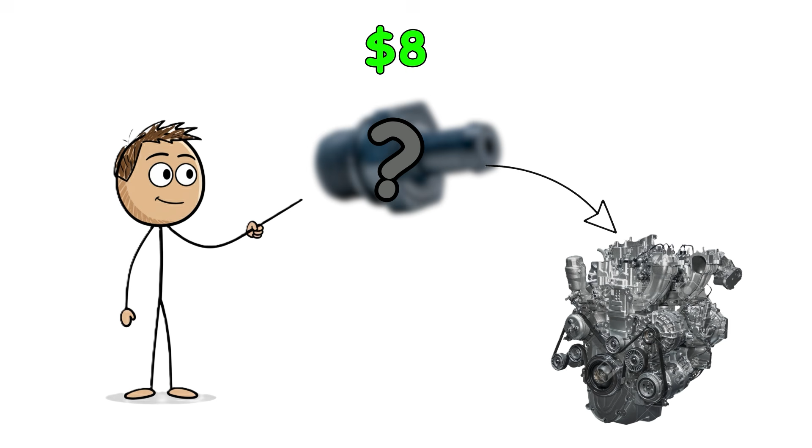There is an $8 valve inside your engine right now. If it sticks in the wrong position, it will suck oil into a cylinder and snap a connecting rod. No check engine light, no warning code, no strange noise. Just a destroyed engine from a part most mechanics forget even exists.

But the more common way it fails is sneakier. Your oil starts disappearing, no puddle, no drips. A mechanic puts it on a lift and cannot find a leak because there is no leak. The oil is being burned inside the engine where nobody can see it. You just keep topping it off every couple weeks wondering where it is going. That is this same $8 valve.

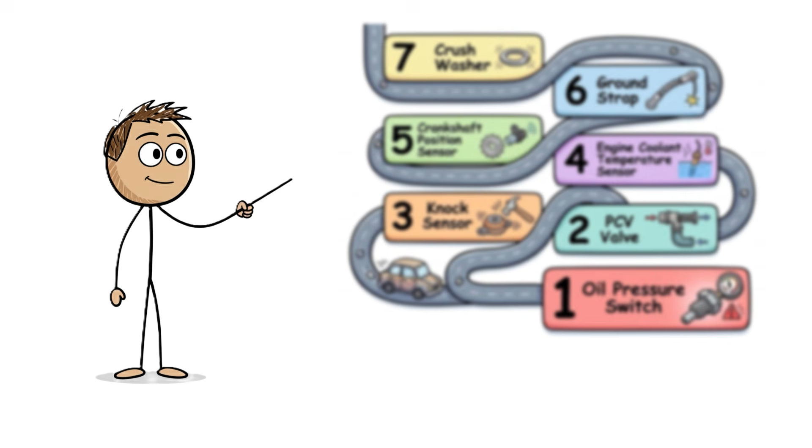That is just one of 7 cheap, overlooked parts quietly killing engines before 100,000 miles. We are counting down from 7 and building to the worst. That $8 valve is number 2, and I will show you exactly how to test yours in 5 seconds. But number 1 on this list is the one that genuinely scares me. A $20 sensor that can be completely dead inside your car right now, and your dashboard will not say a word. There is a class action lawsuit over that one, hundreds of thousands of cars. So stay with me. Alright, starting at number 7.

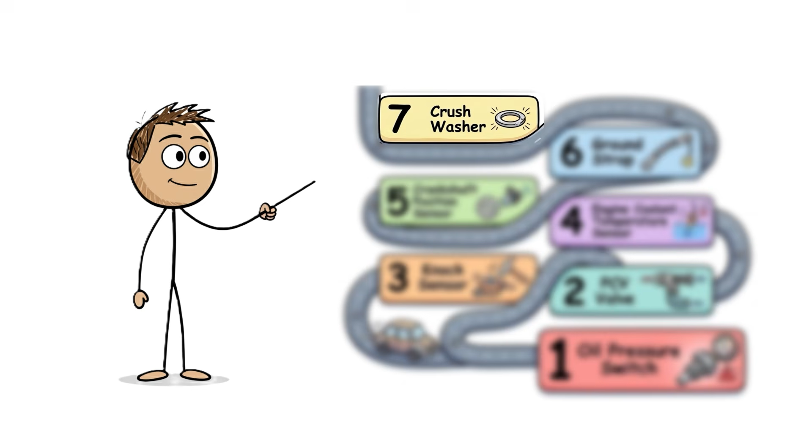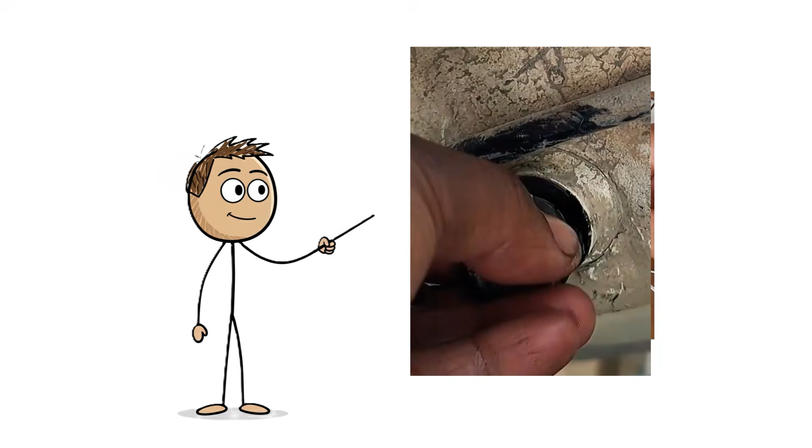The crush washer. If you have ever changed your own oil and woke up to a puddle under your car 3 days later, this is probably why. This tiny metal ring sits between your drain plug and the oil pan. When you tighten the plug, the washer crushes flat, and that deformation is what creates the seal.

It is designed to crush once. After that, it cannot seal again. Trying to reuse one is like trying to reseal an envelope you already ripped open.

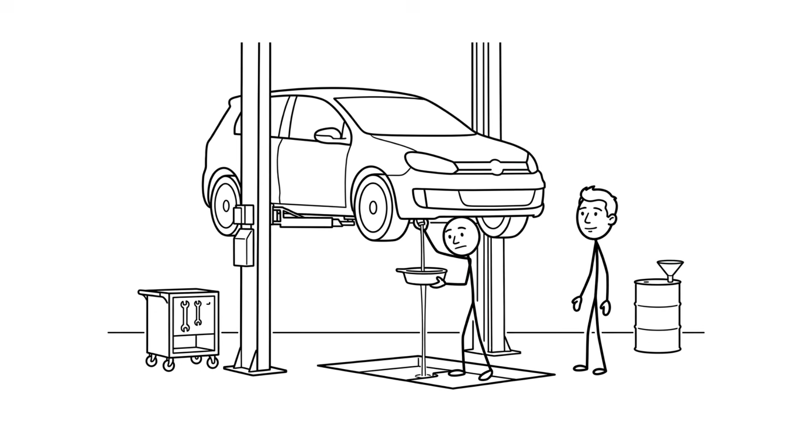Your drain plug is hard steel. Your oil pan on most modern cars is soft aluminum. That washer is the only buffer between them. Without it, steel grinds into aluminum every time you tighten. Do that 3 or 4 oil changes in a row and you strip the threads out of the pan. Now you need a whole new oil pan, over a $1 washer.

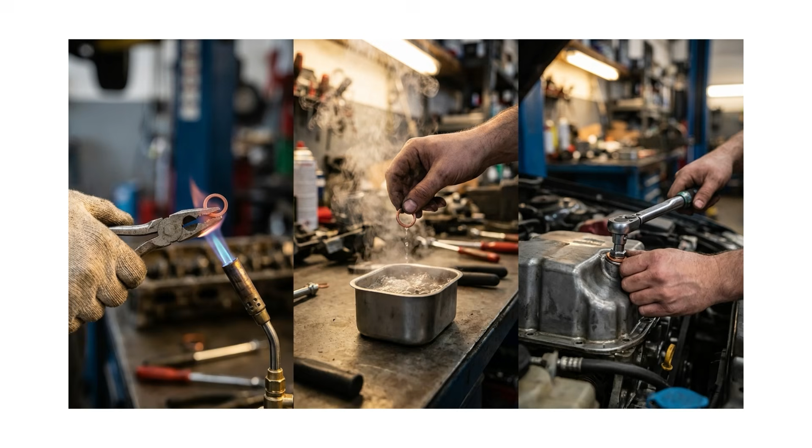Not all washers are the same though. Aluminum ones are most common, but forums are loaded with stories about them cracking under compression. Copper is thicker and more forgiving, and you can reuse copper if you anneal it by heating it to a dull red and quenching in water. But the favorite that keeps coming up is the GM metal rubber composite gasket. It seals easily even on damaged surfaces. The Stat-O seal washer with a rubber inner ring bonded to a metal outer ring is another solid choice.

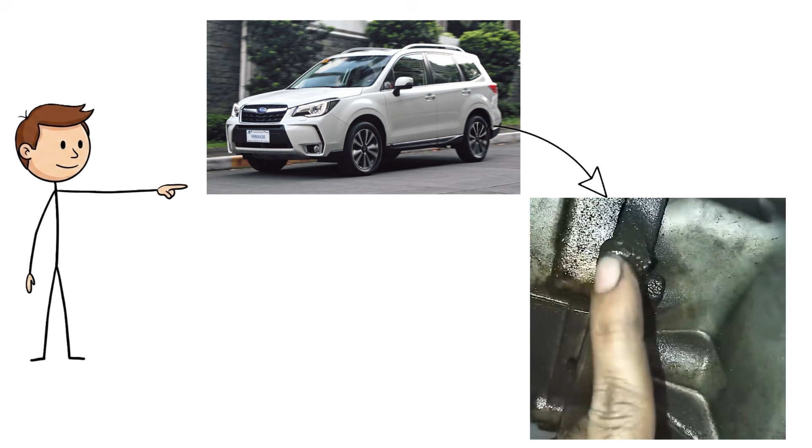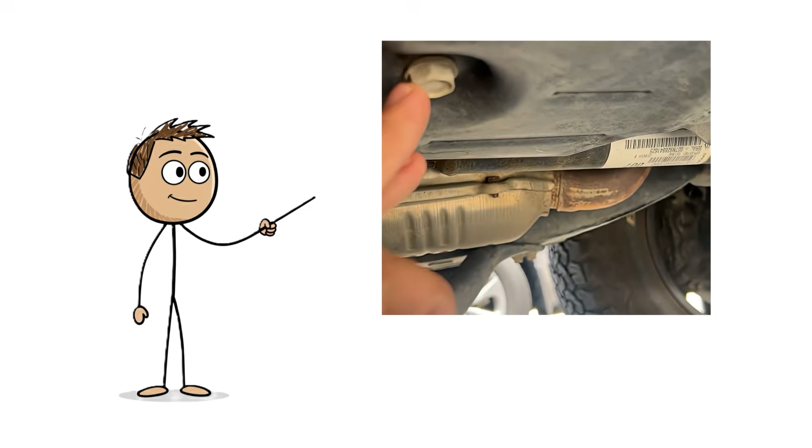Here is something that genuinely made me angry. Even buying from a dealership does not guarantee a real OEM part. One Subaru Forester owner kept leaking no matter what. Bought washers from the local dealer, still leaking. Drove 50 miles to the dealer where they originally purchased the car, got washers in genuine Subaru branded packaging, and the leak stopped immediately. The local dealer had been selling thinner aftermarket washers in OEM packaging. That tiny thickness difference was the entire problem.

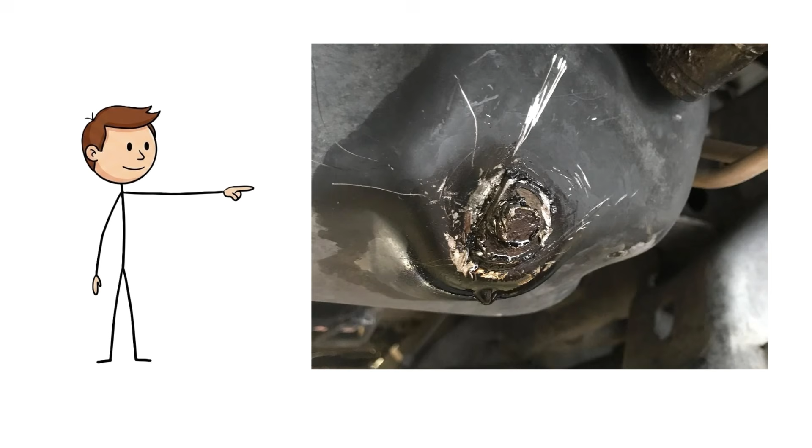Biggest mistake is double stacking. Your old washer gets baked onto the plug by heat and old oil. You cannot even see it, so you throw a new one on top. 2 washers and neither one sealing, guaranteed leak. Second mistake is not tightening enough, because the washer needs to actually crush, but over-tightening is worse. It dents the oil pan surface permanently, and no washer will ever seal on that spot again.

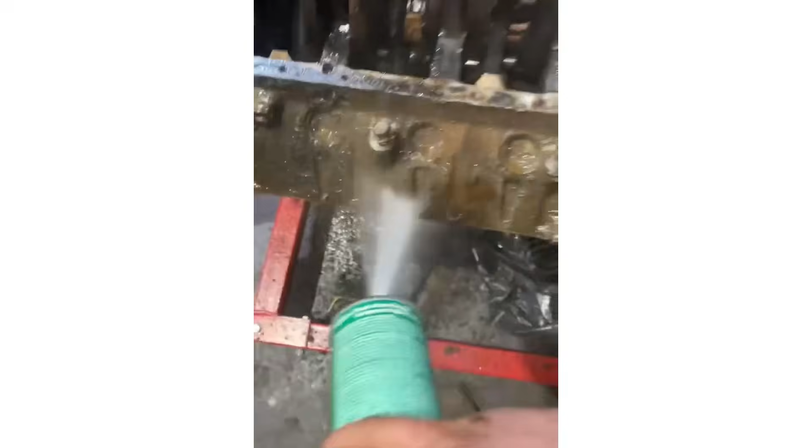Correct torque for most cars is 23 to 30 foot-pounds. For BMW M4's only 18. The crush washer does the sealing, not your arm strength. Get a torque wrench. Sometimes the drain plug is not even the leak. Oil from a valve cover gasket or oil filter housing can run down and pool right at the drain plug. Clean everything with brake cleaner, let it sit overnight, then check where the fresh oil is actually coming from.

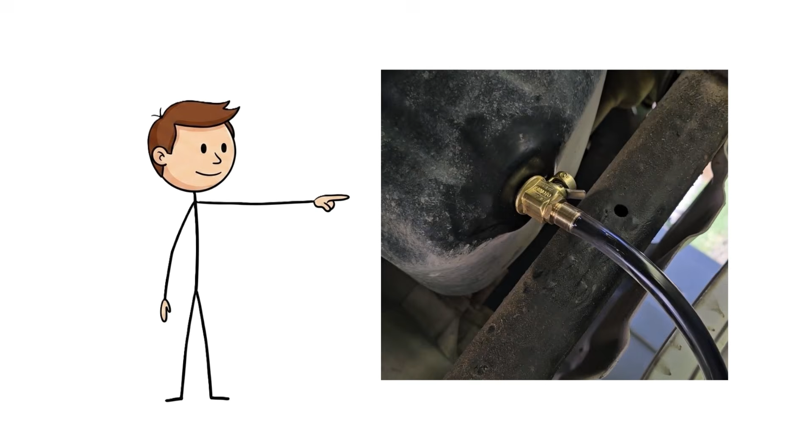Best upgrade is the Fumoto valve. It replaces your drain plug entirely, no more crush washers ever. Attach a hose and open the valve. People report years of 0 leaks. A crush washer costs $1. A new engine costs thousands.

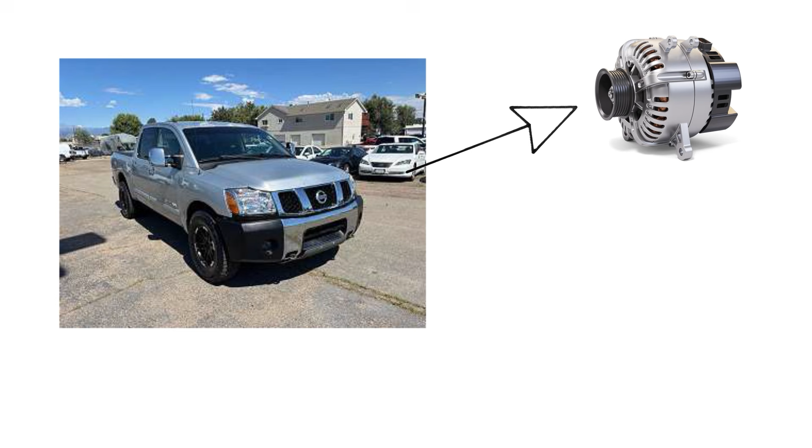Number 6. This one is a completely different kind of scary because we are going from a slow oil leak to an entire electrical system getting fried overnight. The bill was over $10,000. A 2005 Nissan Titan goes in for a routine alternator and battery swap. Everything works perfectly before the repair. Radio, gauges, power windows, everything. The owner picks it up and every electronic component is dead, all of it fried.

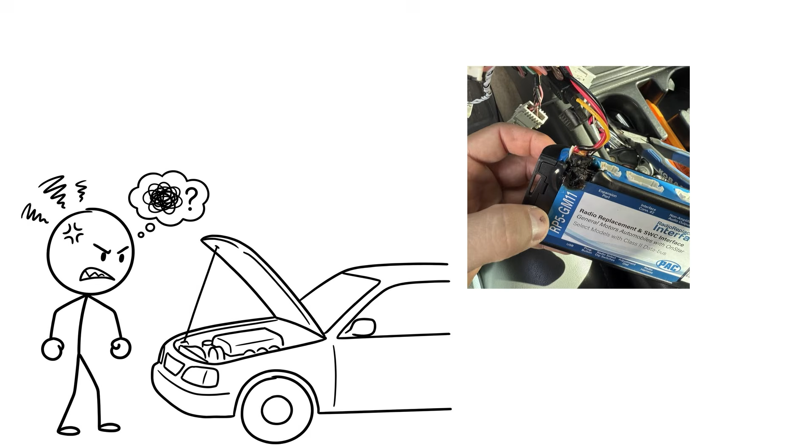The dealership wants $7,000 more on top of $3,500 already paid. Their excuse is that a faulty alternator had been pumping 19 volts before they even touched it. But if everything was working perfectly before they touched the car, how does a pre-existing alternator problem cause damage that only shows up after the repair? That does not add up.

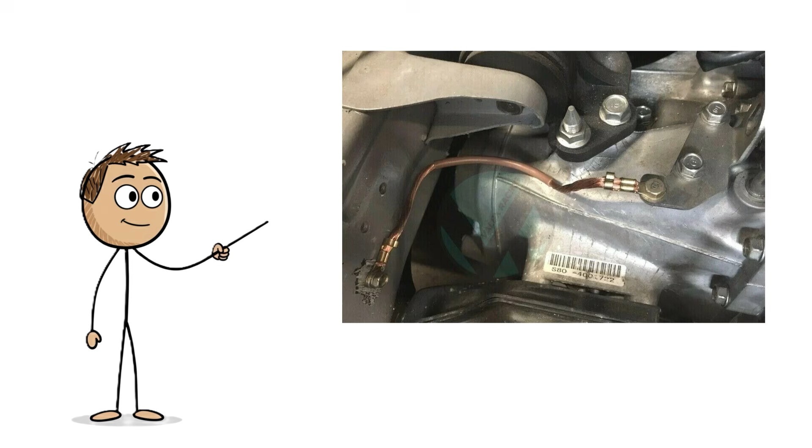Here is what most people get wrong. A bad ground strap does not cause overcharging. It causes undercharging. A corroded ground connection adds resistance. The alternator cannot push full current through, so voltage drops. Lights flicker, gauges act weird.

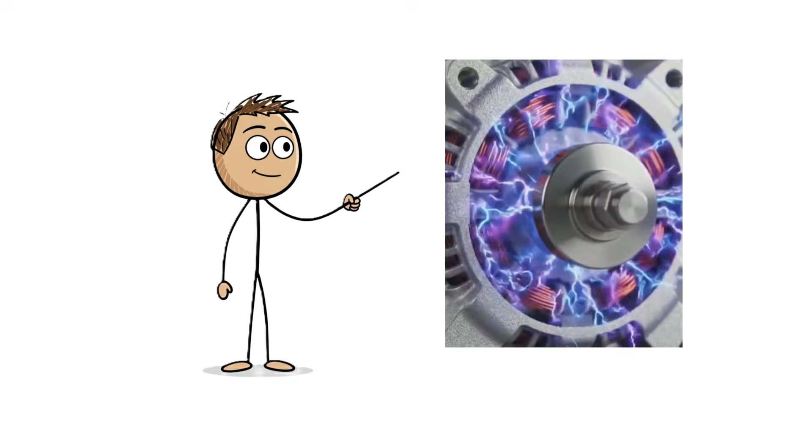What actually causes overcharging and fries electronics is a failed voltage regulator stuck wide open. That sends unregulated voltage straight through everything. Bad ground means low voltage. Bad regulator means high voltage. Mix those up and you chase the wrong problem for months.

The fix is almost embarrassing. Clean the ground connections. Sand or wire brush them until you see shiny bare metal. Bolt everything tight. 5 minutes, costs nothing. To test it, grab a multimeter set to DC volts. One probe on the engine block, one on the battery negative terminal, with the engine running it should be close to zero. Anything over half a volt means you have a ground resistance problem.

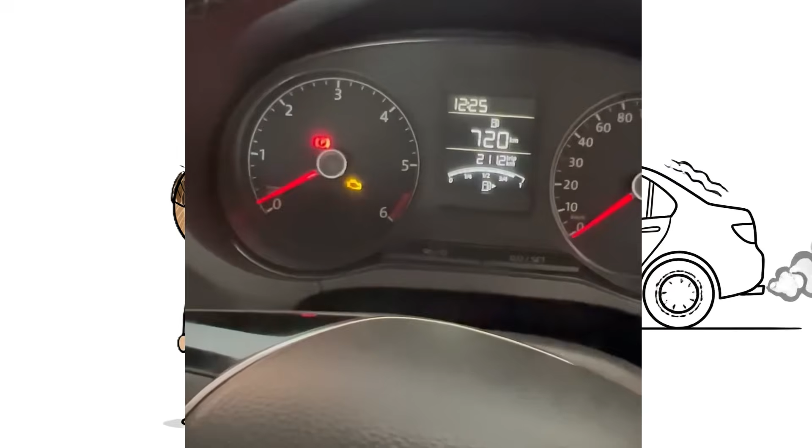Now number 5 is where things get strange. This sensor works perfectly when your engine is cold, and then just stops working the moment things heat up. You are driving home from work, engine running smooth, then it just shuts off. No sputtering, no hesitation, just silence. You coast to the shoulder, try to restart, nothing. 20 minutes later, it fires right up like nothing happened. Drive a mile, it dies again.

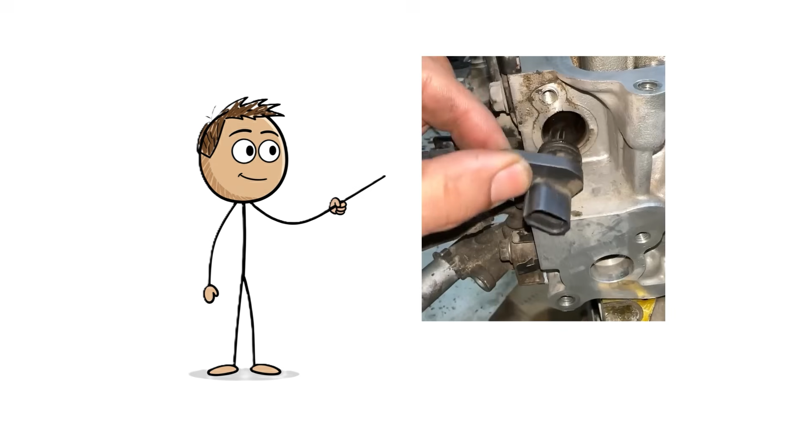That is the crankshaft position sensor failing from heat. A 1990 Cutlass Supreme with only 36,000 miles did the exact same thing. Cold engine works, hot engine dies. Wait for it to cool down, and it fixes itself. Now try explaining that to a mechanic who tests the car after it has been sitting in his shop for an hour. He finds nothing wrong, because at that moment, nothing is wrong.

Inside the sensor is a magnet. When it gets too hot, the magnet loses strength. It hits a threshold and the signal drops off a cliff. No signal means no spark and no fuel. Engine dies.

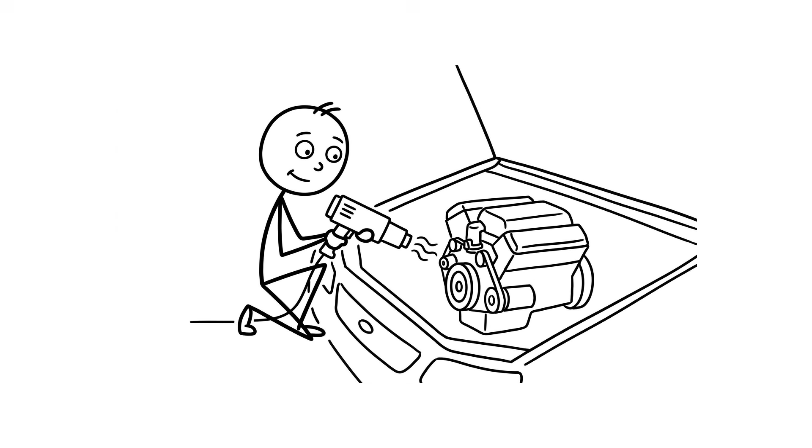One forum user proved this perfectly. Heat gun on the sensor, engine died. Compressed air to cool it, engine restarted. Cleanest diagnostic you will ever see.

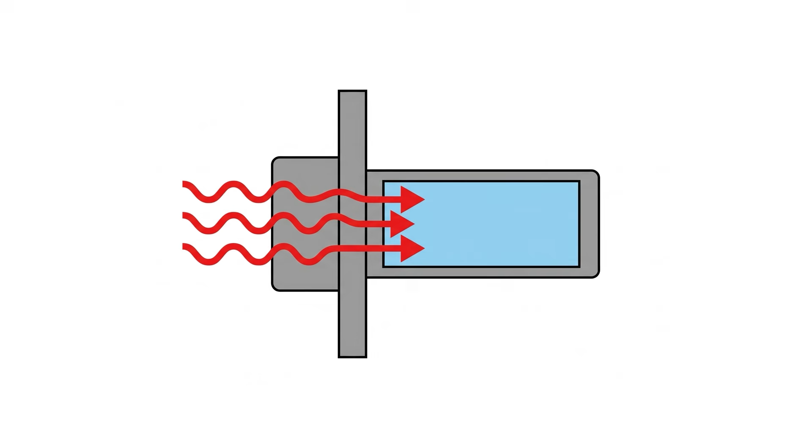OEM sensors use plastic casings that insulate from engine heat. Cheap aftermarket CKP sensors use all metal housings that conduct heat directly into the magnet. One owner said their aftermarket metal sensor failed from heat in weeks, while the factory plastic one lasted years. On this part, do not go cheap. OEM, or a quality brand like Napa, even if it costs $100.

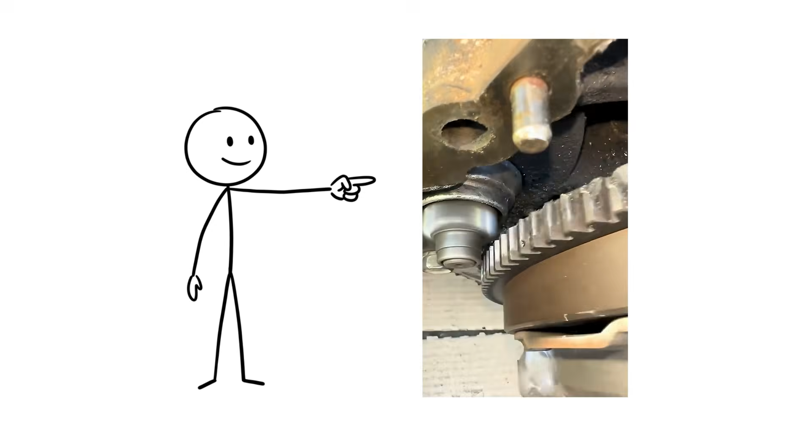But sometimes the sensor is not the problem. A VW Polo owner replaced theirs, fixed for 1 week, same failure. Actual problem was the reluctor ring with worn teeth. Heat expansion changed the air gap just enough to kill the signal. A scan tool cannot catch that.

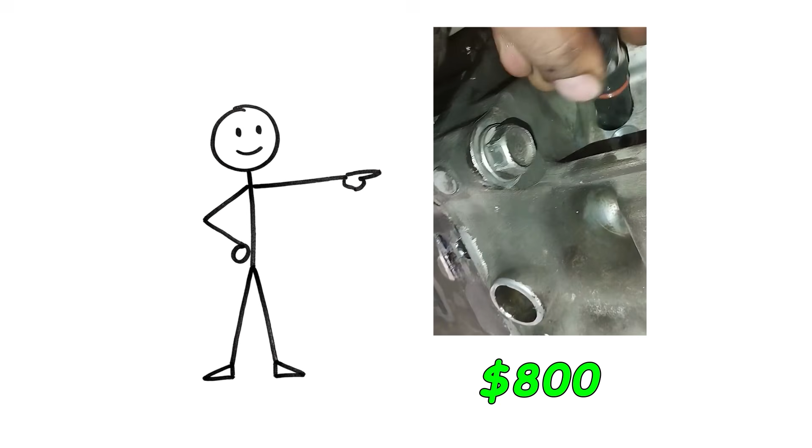You need an oscilloscope. Another owner dropped $800 on a sensor replacement and had the same failure 6 months later at highway speed. Root cause was chafed wiring in the harness. Crankshaft position sensor was fine the whole time. Always check wiring before you spend money on a new sensor. And on some engines like the 2002 Accord V6, the sensor is buried behind the timing belt.

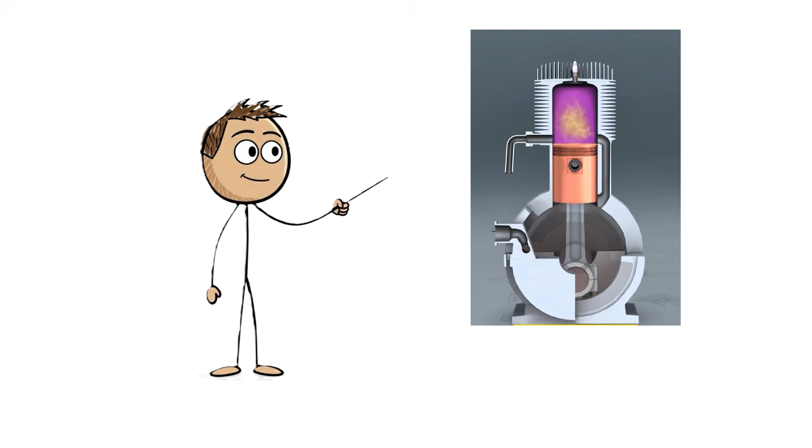Number 4. This one does the opposite damage. Instead of shutting your engine off, it keeps it running in a way that slowly destroys it from the inside. And your dashboard might tell you everything is normal the entire time.

The engine coolant temperature sensor, about $20. When it fails, it gets stuck reading cold. Computer thinks the engine is freezing and dumps in extra fuel. That extra fuel washes oil off the cylinder walls, dilutes your engine oil, overwhelms the catalytic converter, fouls spark plugs.

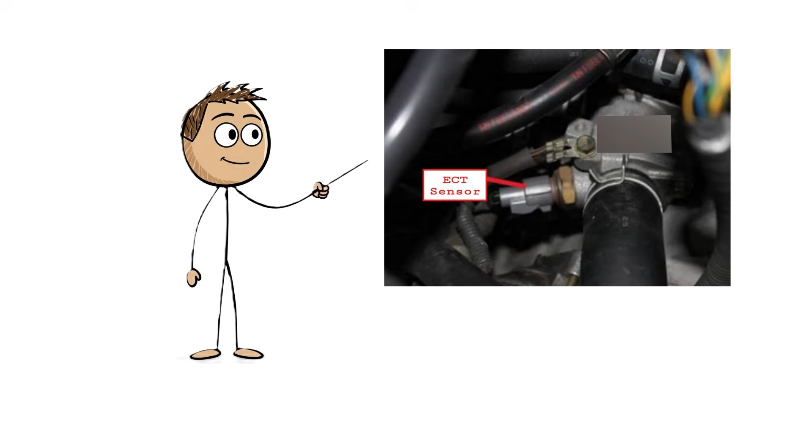Meanwhile, your temperature gauge says everything is fine. But here is the trap. A lot of cars have 2 completely separate temperature sensors. One talks to the engine computer, the other talks to your dashboard gauge. Completely independent systems. Your gauge can show normal while the computer sensor is totally failed and the engine is running dangerously rich. I have personally seen mechanics miss this.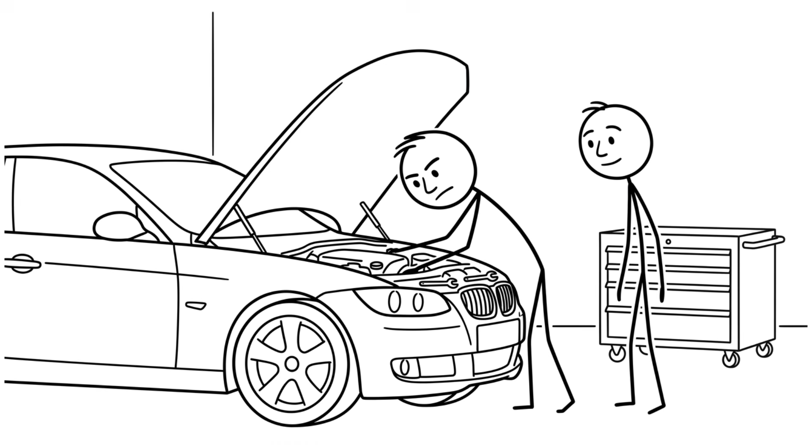A 2003 VW Jetta TDI uses a 2-in-1 4-wire sensor where one side feeds the computer and the other feeds the gauge. Gauge side failed.

Gauge pegged cold, but the engine ran perfectly because the computer side was fine. That is how separate these circuits are.

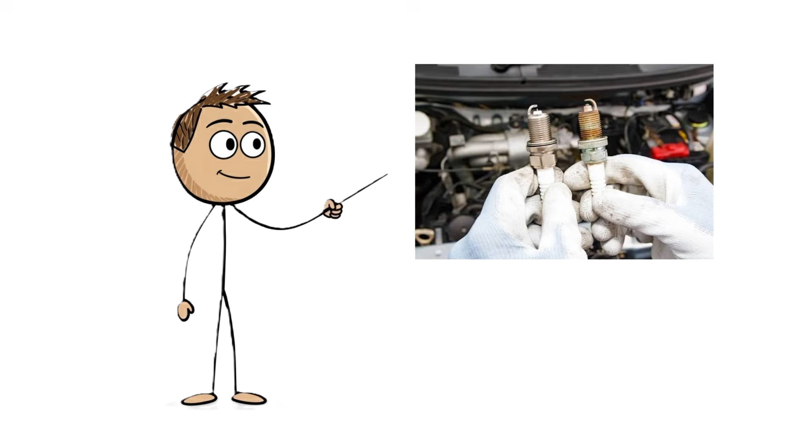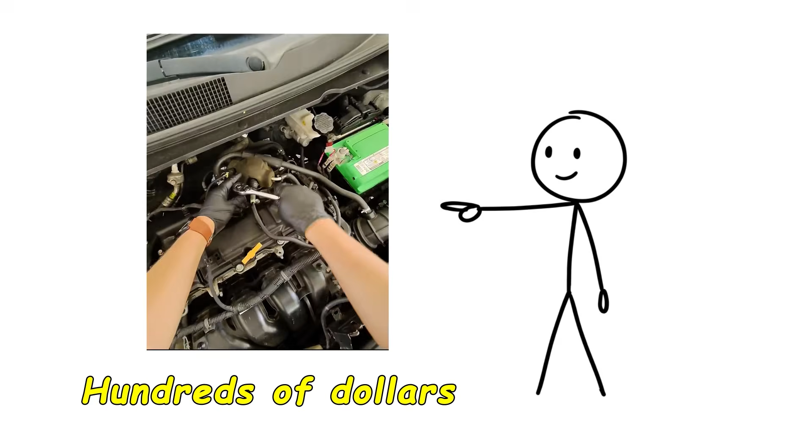A Mercedes E320 owner failed emissions for running too rich, had already replaced coils, wires, plugs, intake air temp sensor, mass airflow sensor, oxygen sensor, even the catalytic converter. Still smelled like gas. Finally, someone checked the engine coolant temperature sensor. Out of spec. That was the whole problem. Hundreds of dollars in unnecessary parts because nobody checked a $20 sensor.

A thermostat stuck open produces almost the same symptoms. Engine never reaches full temperature, so the computer keeps pouring in extra fuel. The difference is that a failed sensor locks the gauge at dead cold with zero movement. A stuck open thermostat lets the gauge rise a little in traffic, but drops back at highway speed because airflow overcools the engine. That pattern tells you which one it is.

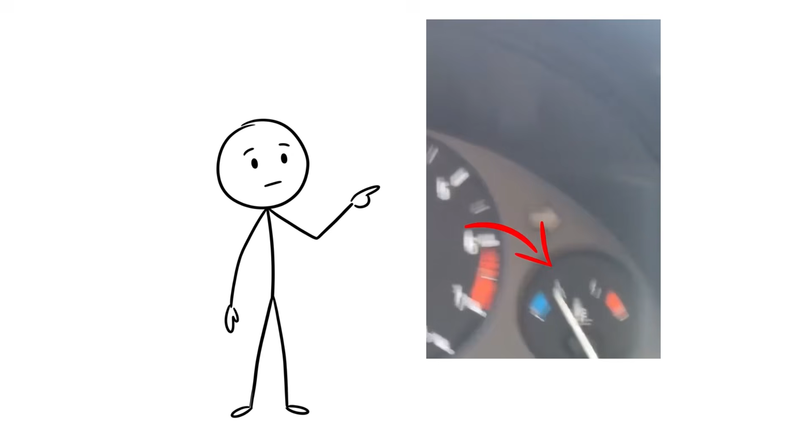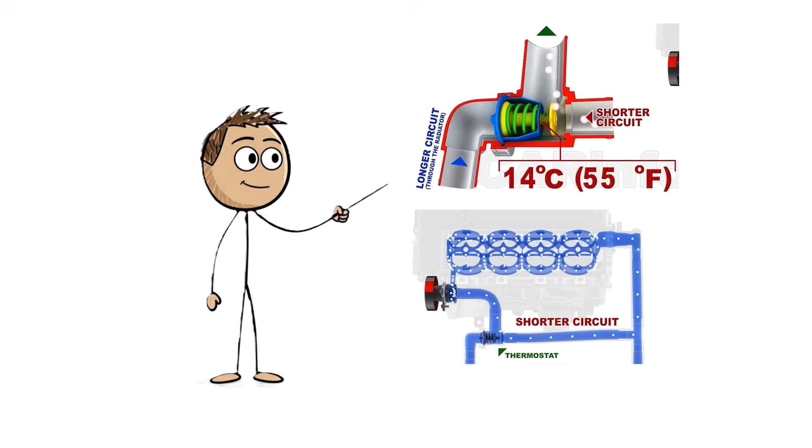Quick test. After 15 minutes of running, squeeze the upper and lower radiator hoses. Both hot means the thermostat is opening normally. Upper hot but lower cold means stuck closed, and that is dangerous because coolant is not circulating. That can crack a head gasket. Do not trust your dashboard temperature gauge. Both the sensor and thermostat run $20 to $30 each. Replace them together and skip the guessing game.

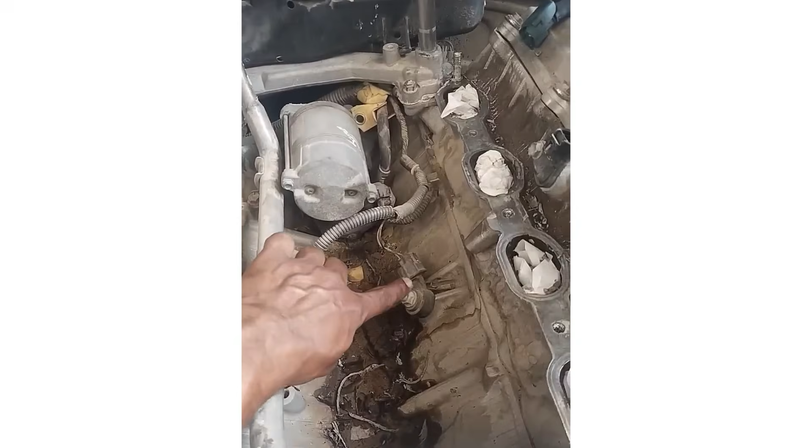Now number 3. Your engine has a built-in microphone bolted to the block right now. Its only job is to listen for the sound of the engine destroying itself. When it fails, you lose that safety net completely, and there is a massive scandal behind this one. But this is not the class action I mentioned at the start. That one is still coming.

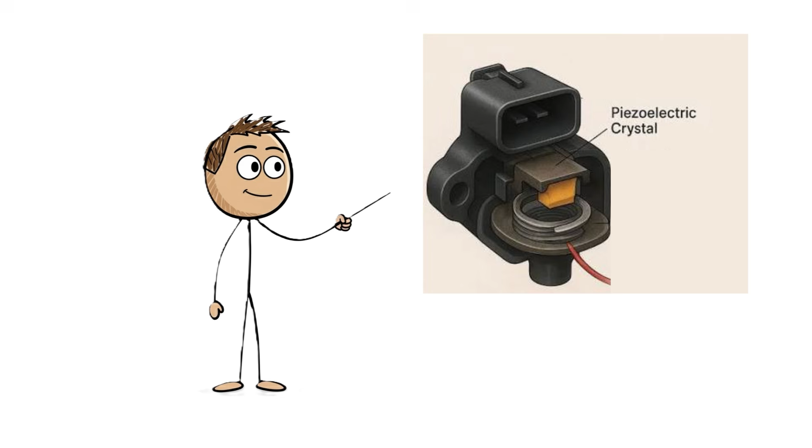The knock sensor, a piezoelectric device that picks up vibration frequencies from detonation. When it detects knocking, it signals the computer to pull timing back to protect the engine. Without it, the computer is flying blind.

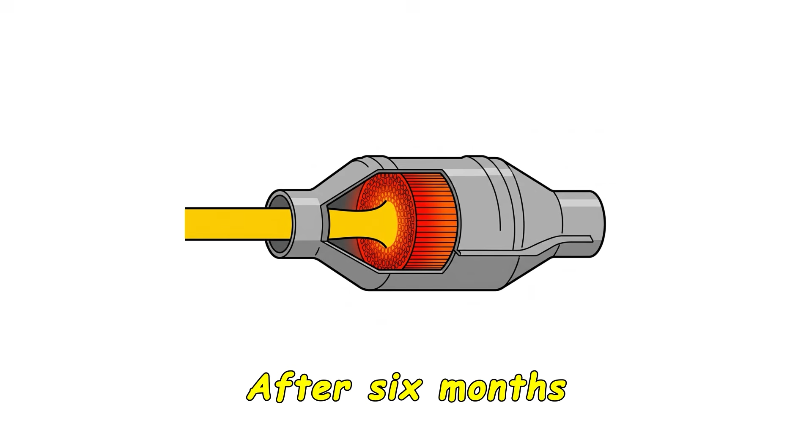A 2001 Lexus LS 430 owner drove almost a year on a failing knock sensor. Computer pulled timing way back, which made the engine run extremely rich. After 6 months, the catalytic converters were almost certainly cooked from all that unburned fuel. Replacing the sensor costs $70. Replacing catalytic converters costs thousands. That is what putting off a repair looks like.

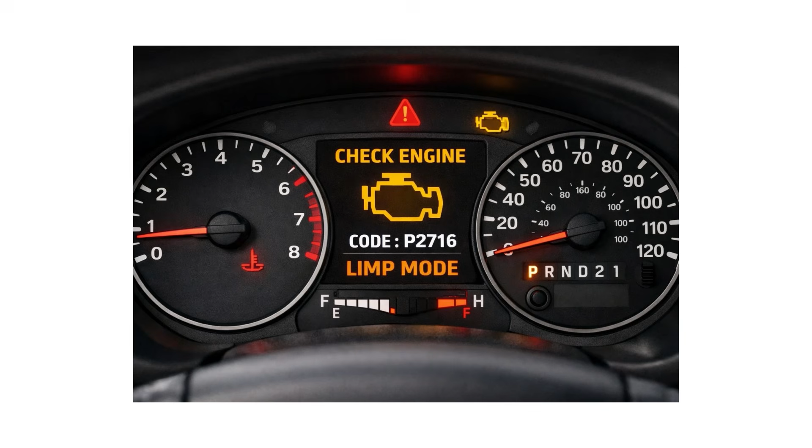Now, the scandal. Hyundai and Kia Theta II engines had a manufacturing defect in the connecting rod bearings. Their software fix, called Campaign 966, repurposed the knock sensor to listen for bearing noise and trigger limp mode. The problem is the software is absurdly oversensitive.

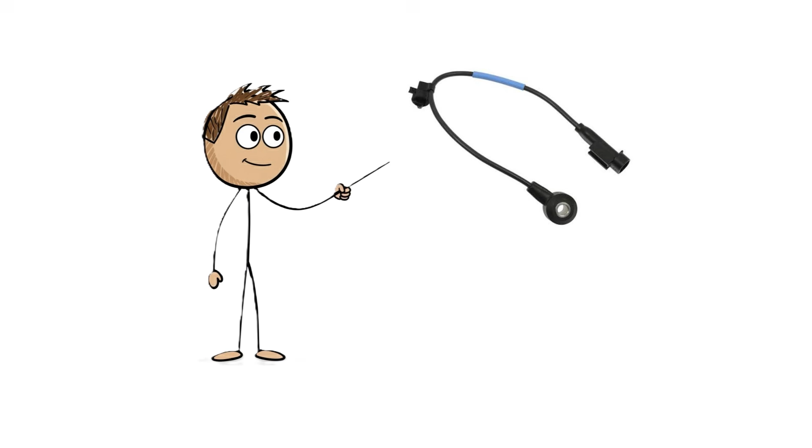Normal engine noises trip it, low oil trips it, driving through a car wash trips it. Hyundai Kona N owners have it especially bad. Known issue with a technical service bulletin and everything. One owner was denied warranty at 60,000 miles as a third owner. Dealer quoted $1,400. The parts cost $70. That is a 20-to-1 markup driven entirely by labor and dealer policy.

Dealerships just clear the code. 20 minutes. Nothing actually solved. Hundreds of thousands of owners affected. Class action lawsuit. Warranty extended to 150,000 miles and it transfers to second owners. If you own one, go to a dealer even if your model is not on the list. People have gotten free replacement engines on vehicles not even named in the lawsuit.

A brand new 2023 Volvo XC60 had a factory defective knock sensor within its first 10 kilometers, $60,000 car. Even Mini Cooper had a full production stop sale over a knock sensor batch. It happens at every price point.

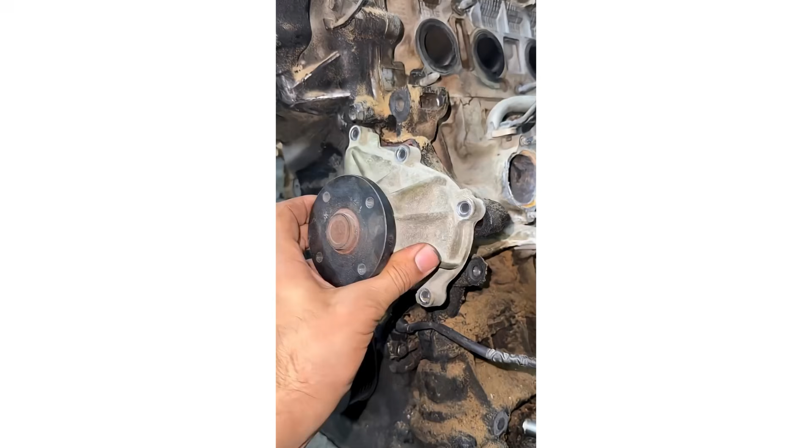But the most important lesson from this section comes from a 2003 Toyota Highlander V6. It overheated severely from a water pump failure. After the repair, it threw knock sensor codes for both banks. Owner replaced both sensors and the wiring harness. Codes kept coming back. The answer was in the oil. Metal flakes. The engine was physically knocking from real internal damage. The sensors were working perfectly and detecting actual destruction.

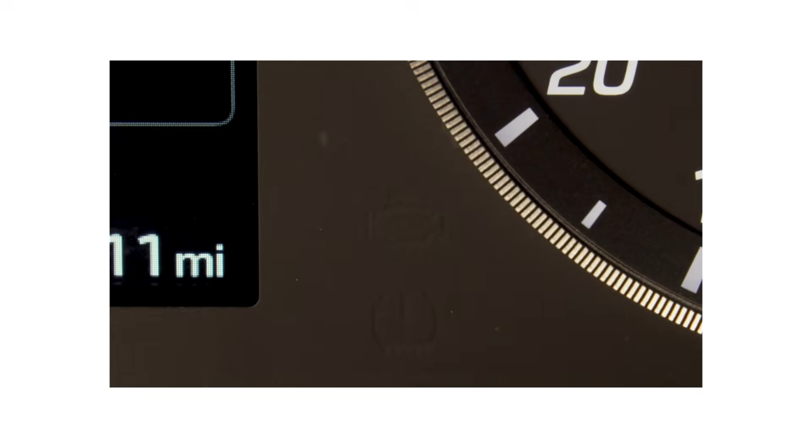If you ever get knock codes after an overheating event, do not throw new sensors at it. Drain the oil and look for metal. Do a compression test. The sensors might be telling you the truth.

Number 2. This is the $8 part from the beginning of this video. The valve that makes oil vanish without a trace. The PCV valve, positive crankcase ventilation. It routes blow-by gases from the crankcase back into the intake manifold to be burned off. $8 to $12 at any parts store. And it fails in two completely opposite ways.

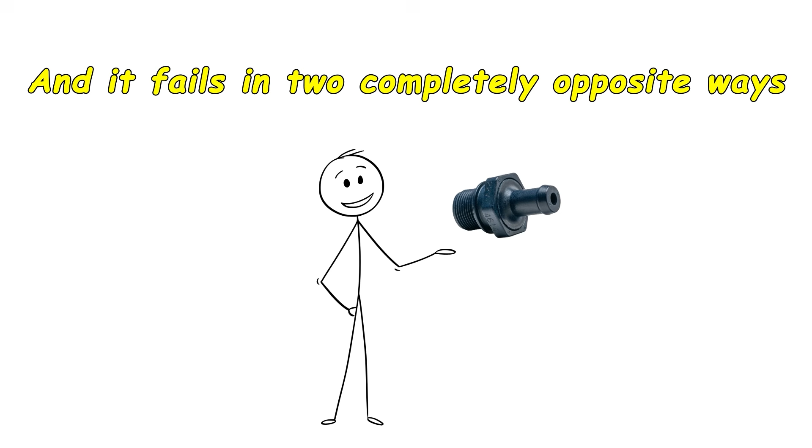Stuck closed and pressure builds up inside the crankcase. That pressure forces oil out through every gasket and seal it can find. Valve cover gaskets. Oil pan gasket. Rear main seal.

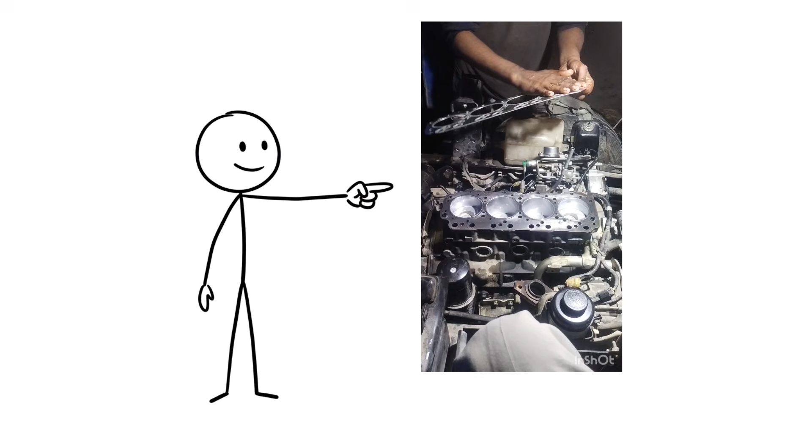You keep replacing gaskets, but the leaks keep coming back because the gaskets were never the problem. The pressure is the problem. No check engine light, engine runs fine, you just keep spending money on gaskets that keep failing.

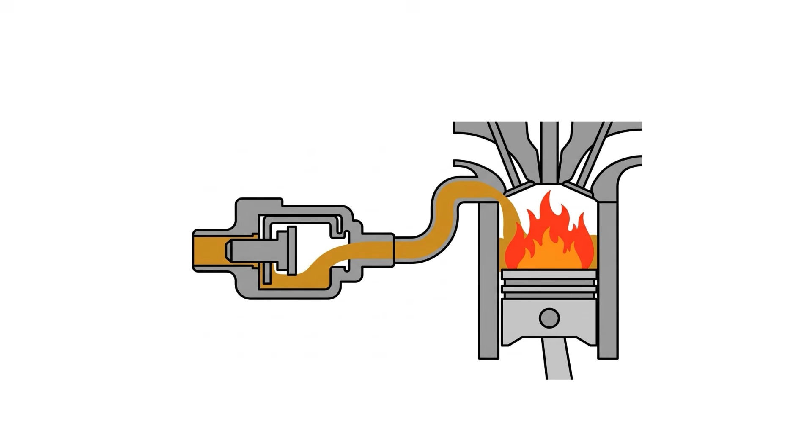Stuck open, and it is what I described at the start. Engine vacuum pulls oil straight out of the crankcase into the intake where it gets burned. Your oil is not leaking. It is being consumed inside the engine and coming out the tailpipe as faint smoke you might not even notice. Stuck open means oil burned, stuck closed means oil pushed out. Figure out which one and you know where to look.

A 2014 Jeep Wrangler with the 3.6 Pentastar had the most frustrating oil consumption pattern. Sometimes 3,000 miles with zero loss, then a quart and a half gone in 1,400 miles on a mountain trip.

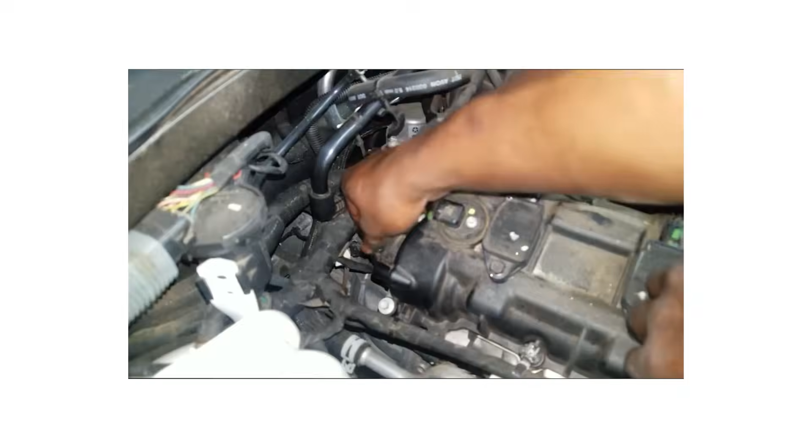The Pentastar uses a centrifuge-style oil separator with a rubber membrane. Over time, the hole in that membrane gets bigger and oily air bypasses the centrifuge entirely. The owner replaced the PCV assembly and oil consumption stopped dead. The old membrane hole was visibly stretched compared to the new one. An $8 fix for what every mechanic called a dying engine.

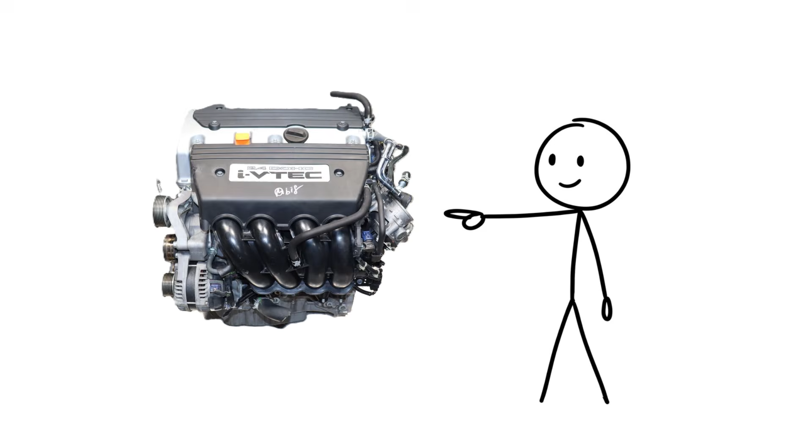Honda Accord owners with the K24 engine see this constantly. One owner was burning a quart every 500 miles, pulled the PCV valve and it failed the rattle test, replaced it. 2,000 miles later, zero oil loss, completely fixed.

On the other end, a 2022 Subaru WRX owner was burning a quart every 800 miles, replaced the PCV valve and it worked for a while, but the consumption came back. Root cause turned out to be piston ring tolerances from the factory.

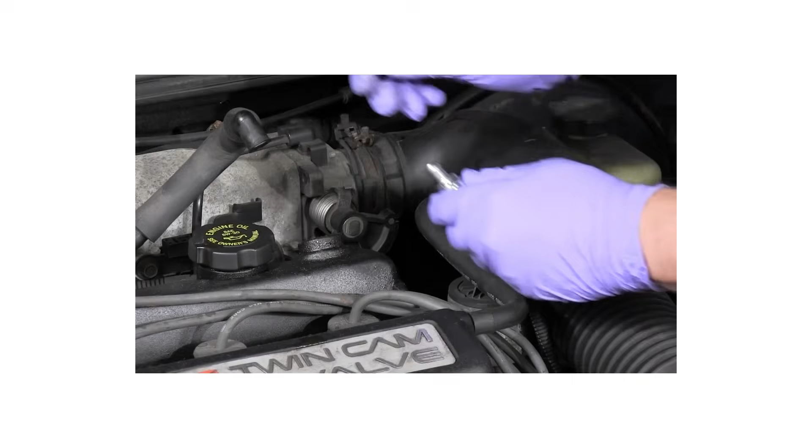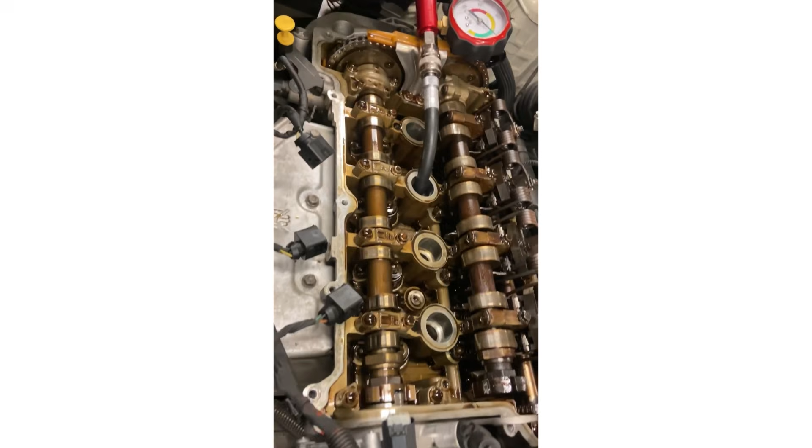So here is the lesson. PCV replacement is always the right first step because it is cheap and often fixes it entirely. But if the consumption returns after a new PCV valve, push for a compression test and leak down test. The PCV fix might have been masking a deeper problem.

A 2011 Honda CR-Z owner never burned oil in 125,000 miles until one sustained high-speed highway run. Sudden onset after extreme heat, same root cause. And on the GM Cruze 1.4 Turbo, the PCV check valve sits inside the intake manifold. When it fails, it gets sucked into the engine. Car boosts fine for 10 minutes, then falls flat.

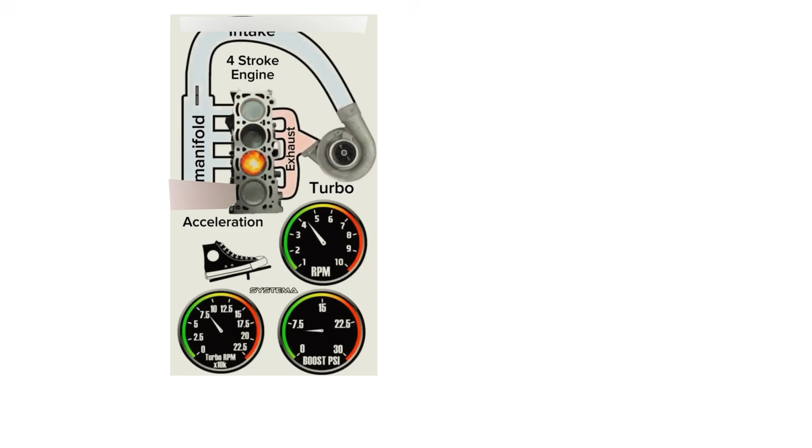Repeat. On turbocharged cars, it gets worse. Under boost, the intake side gets pressurized. The PCV valve is supposed to close, but one forum user tested multiple brand new valves with a compressor and every single one leaked. Your stock PCV on a turbo car is a direct boost leak.

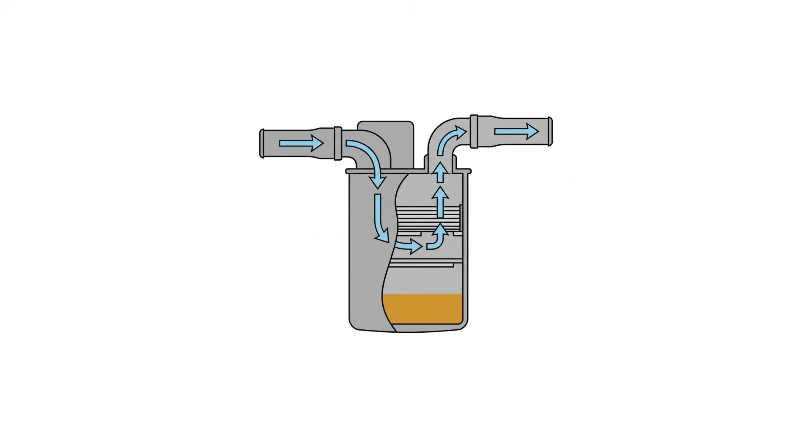The real fix is a brass check valve inline. A catch can does not fix this. A catch can only collect vapor that has already escaped. You need the check valve to stop pressurized air from flowing backwards through the PCV line.

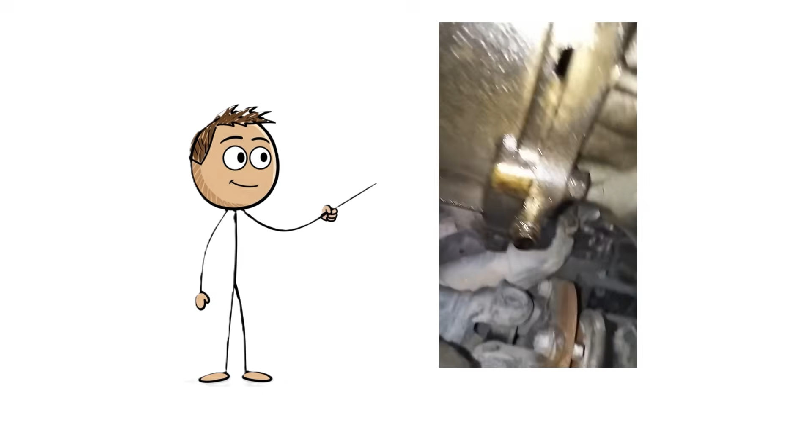For VW and Audi EA888 engines, this failure is so common that one mechanic says he replaces multiple PCV assemblies every single day. If the PCV fails on these engines, crankcase pressure blows the rear main seal. Replacing a rear main seal means pulling the entire transmission. Thousands of dollars. A $55 PCV assembly every 50,000 miles prevents the whole thing.

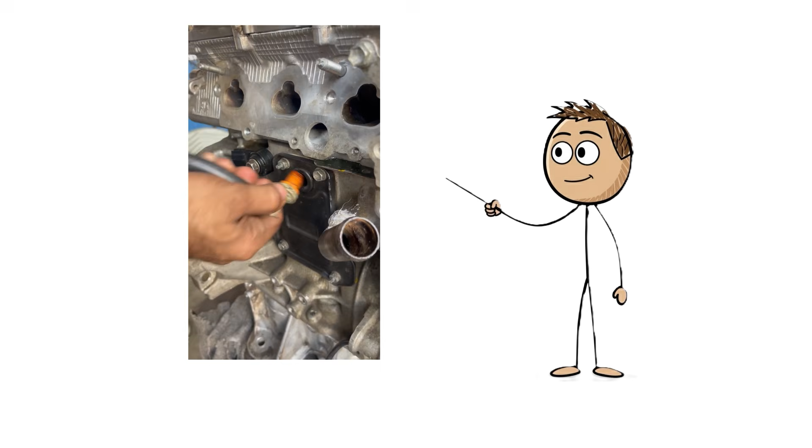And the Honda K-Series shows the worst case. PCV fails open, oil gets sucked into the intake, pools in one cylinder. Piston comes up and tries to compress it. Liquid does not compress. The connecting rod buckles or snaps. Hydrolock. Catastrophic engine failure from an $8 valve nobody checked.

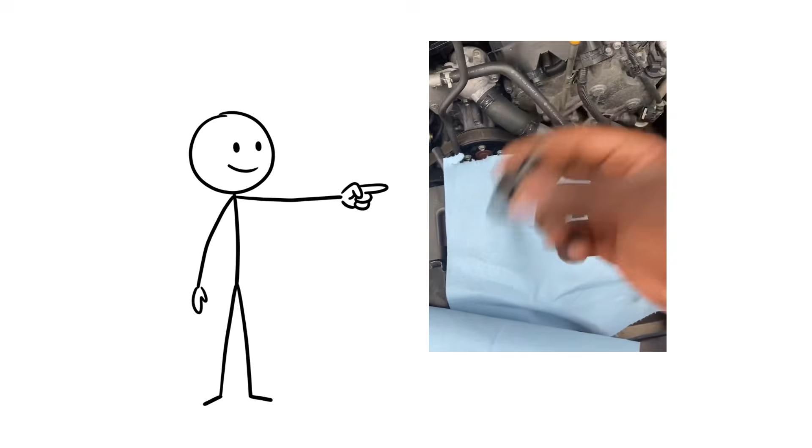5-second test. Pull the PCV valve out and shake it. Rattles freely, it is probably fine. Silent or stuck, replace it. $8, 5 seconds, cheapest insurance your engine will ever have.

And now number 1, the last one. Honestly, this is the one that has been on my mind the entire time because everything else on this list at least gives you a sign. Oil disappearing, lights flickering, engine dying randomly. Something feels off. This last part gives you nothing. 0 symptoms, 0 clues. And then one day, your engine just seizes.

This is the class action I have been telling you about. A 2016 Kia Sedona, owner is driving normally. Engine seizes. No warning lights ever came on. No weird noises, no performance issues. Just driving one moment and then the engine is gone.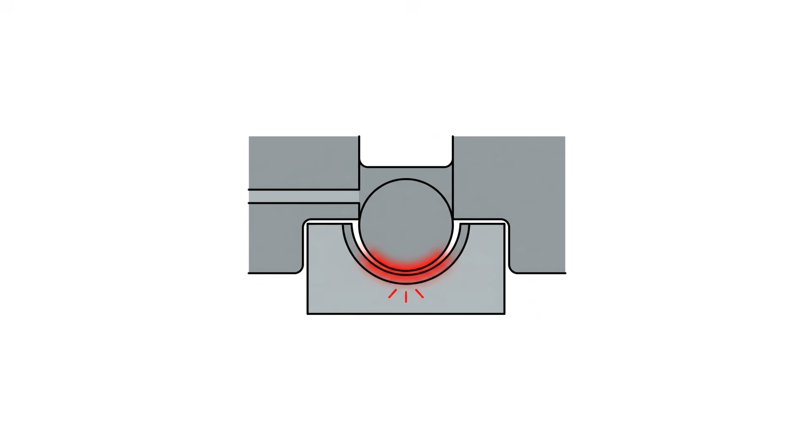Complete oil starvation. A Ford Edge owner had the exact same outcome. Checked the oil and believed everything was normal. Engine locked up solid while driving. No prior warnings of any kind. This is not a one-brand problem.

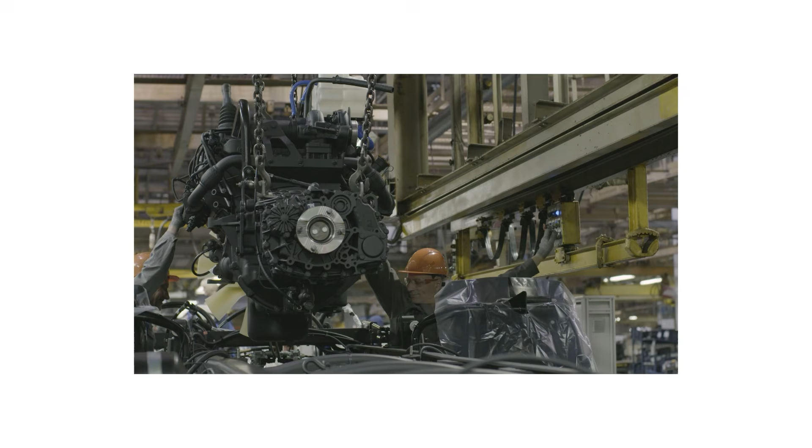It happens across manufacturers. Why did the oil light never come on? The oil pressure light does not monitor oil level. It monitors oil pressure. Most cars do not even have an oil level sensor, only a pressure switch.

By the time pressure drops enough to trigger that switch, the damage has already started. This is not a warning system. It is a death notification.

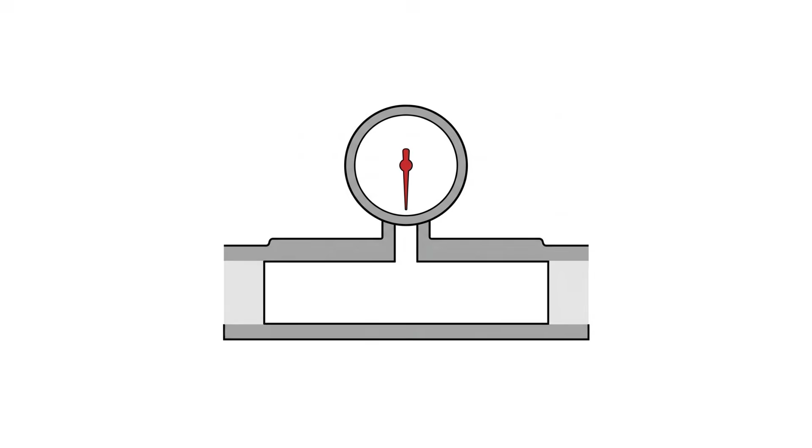The pressure switch itself can fail, stuck open. When that happens, the light physically cannot turn on, even at 0 oil pressure, no trouble code, no scan tool flag.

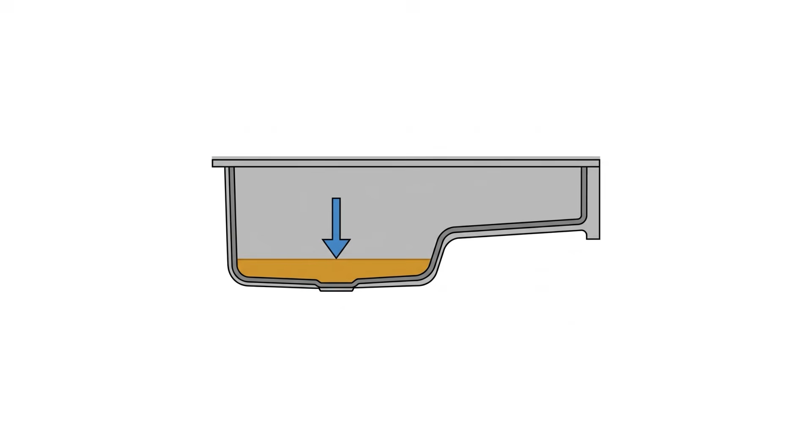Here is how it plays out. Engine burns a little oil over months. Nobody checks the dipstick because the dashboard shows no warnings. Level drops gradually. As long as there is enough oil for the pump to maintain pressure during normal cruising, the switch reads fine. Then during hard acceleration or going up a hill, the remaining oil sloshes away from the pickup tube.

Pump sucks air. Pressure drops instantly. Oil light comes on. But the bearings have already made contact with the crankshaft. Metal on metal. The engine can seize within seconds of that light appearing.

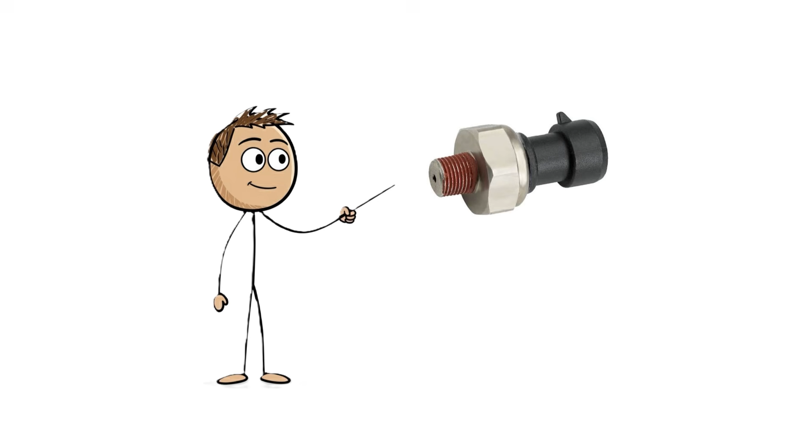That bulb test, when you turn the key and the oil light comes on for a second, that only tests the bulb and wiring, not the sensor. Your pressure switch could be dead right now, and that key-on test would still pass.

BMW owners have their own version. On N51, N52, N54, and N55 engines, the oil pressure switch can leak oil into its own electrical connector and down through the wiring harness. The computer loses communication with the sensor and silently skips the oil level check. No warning, no fault code.

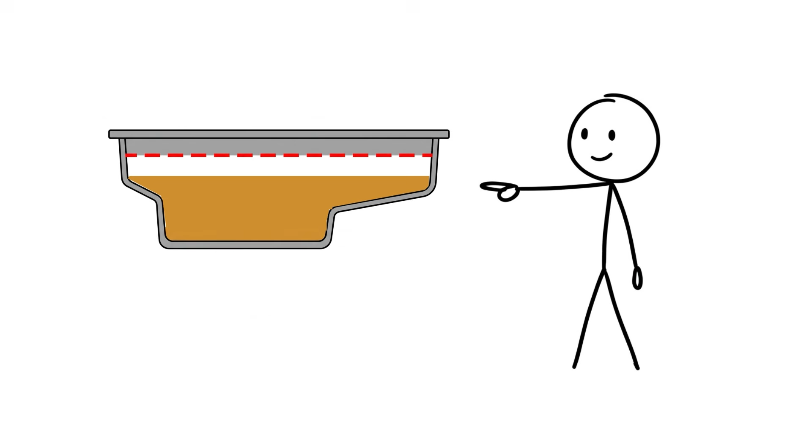One owner was 2.5 liters low, a 38% oil deficit. No idea, because the system had been silently failing for months.

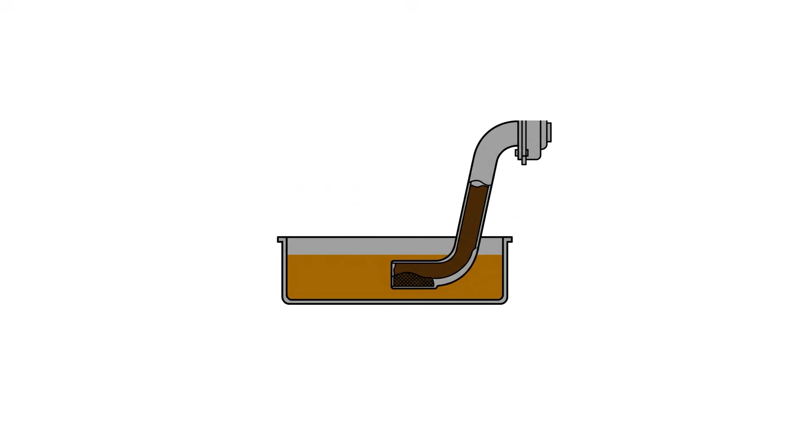An Audi 1.8T owner got a red oil pressure warning on the Autobahn at 180 kilometers per hour. Drove 5 more kilometers looking for somewhere safe to stop. Engine started grinding. Root cause was a clogged pickup tube from sludge buildup. Engine survived with a €700 repair. But the damage came from those extra 5 kilometers. That is all the distance between a minor fix and a destroyed engine.

If that oil pressure light ever comes on, pull over right there. Not the next exit, not a gas station, right there. If you hear knocking or ticking, shut the engine off that second. Do not drive another foot. Call a tow truck. Every second of metal-on-metal contact is doing permanent damage that cannot be undone.

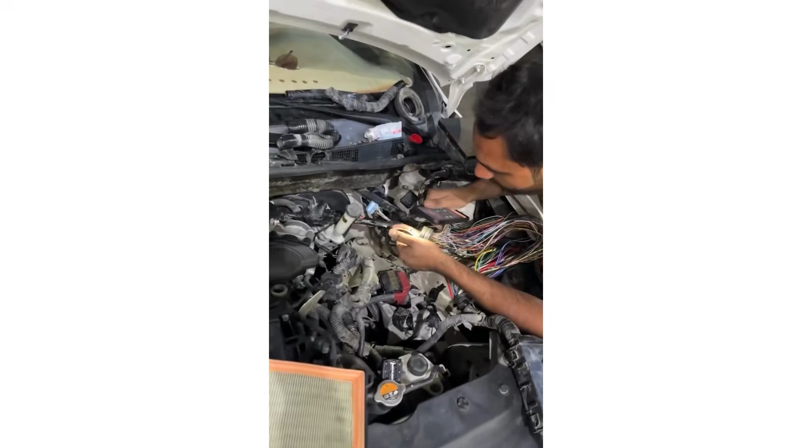One more thing though, not every seized engine diagnosis is real. A 2015 Mazda 6 owner got told by a mechanic 200 miles from home that the engine was completely seized, but the oil light had never come on. Forums said try turning the engine by hand using a breaker bar on the crankshaft bolt. If it turns, it is not seized. Turned out to be an electrical problem. That second opinion saved thousands.

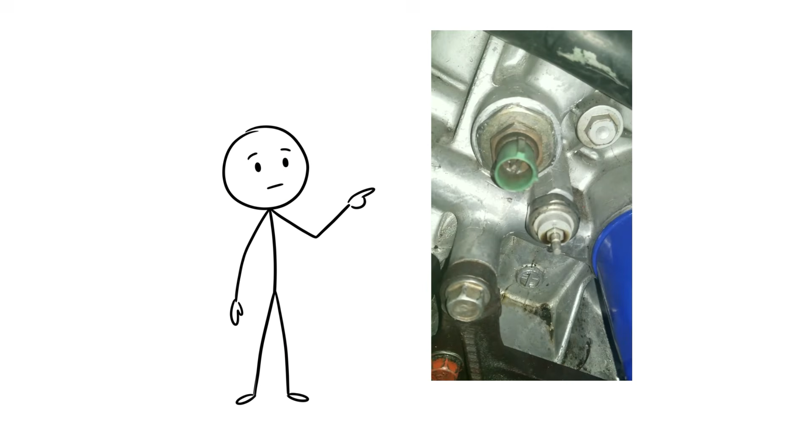A Dodge Ram 3.7 V6 owner had the gauge drop to 0 at idle, then read normal when accelerating. No knocking, no ticking. Classic failing sending unit, not a failing pump. But a 1972 Chrysler Newport owner drove home on the expressway with the oil light on because the engine sounded fine. He gambled and got lucky.

Do not do that. The only way to truly know your oil pressure is a mechanical gauge tapped directly into the oil system. Dashboard gauges go through sending units that can be just as unreliable. A mechanical gauge cannot lie.

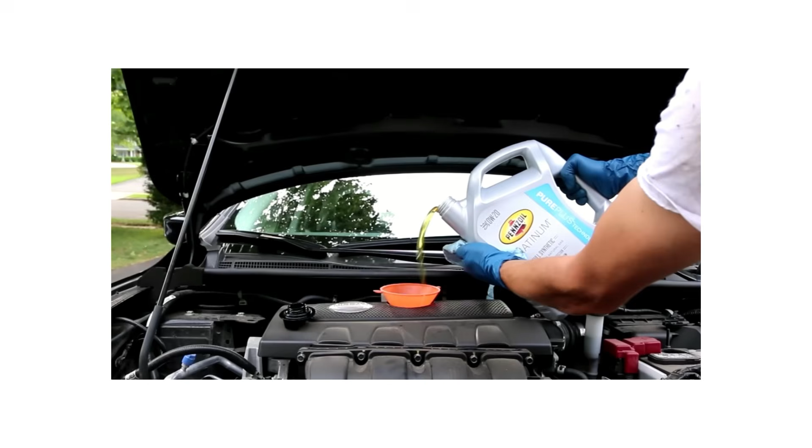Here's the bottom line. Check your oil with the dipstick every 2 weeks. The warning system in your car might already be broken, and it will never tell you. Change oil on schedule with the correct viscosity. Old oil turns to sludge and clogs the pickup tube. That is how starvation starts.

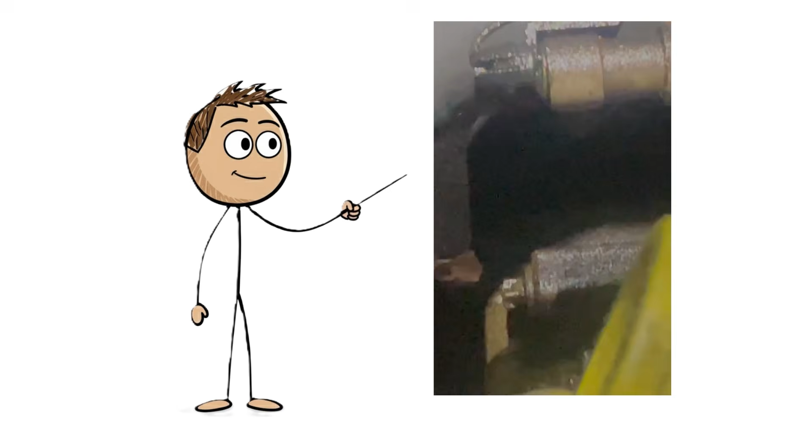If the oil pressure light comes on, pull over and shut off the engine immediately. If you hear knocking or ticking, kill the engine. Every second matters. BMW owners, check that oil pressure switch connector for oil contamination even if everything seems normal. Kia and Hyundai owners, check your oil constantly and know your warranty rights. Even if your model is not listed, take it to a dealer anyway. People have gotten full engine replacements on models never officially covered.

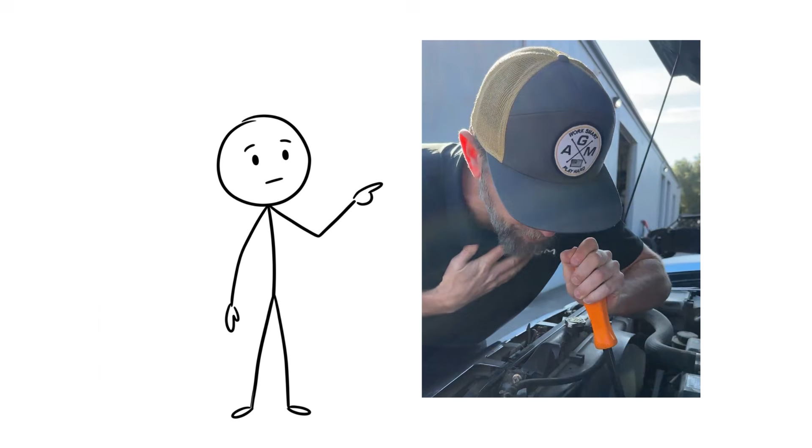7 parts, all under $50, all overlooked. Any one of them can quietly destroy an engine that had years of life left. The most expensive mistake in car ownership is not a part failing, it is assuming no warning means no problem. Check your oil, listen to your engine, and never assume silence means everything is fine.